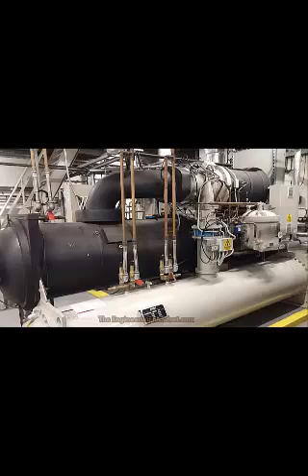The centrifugal type compressor looks a lot like this. It is quite easy to spot because it's got this large unit up on the top of the chiller. You've got the suction line coming off of the evaporator and flowing into this volute shape, and then off of that comes the refrigerant down into the condenser.

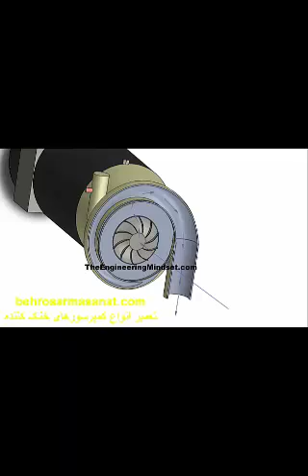So the refrigerant flows, hits into the impeller blades. These rotate, pushes down into the condenser. So the refrigerant flies in, and then as it's flung off of this compressor, it travels in all directions, just collecting up in that volute and going off into the condenser. And you can see that in this animation here, where the particle here is being flung off. So it's a very common setup for a central plant in large buildings.

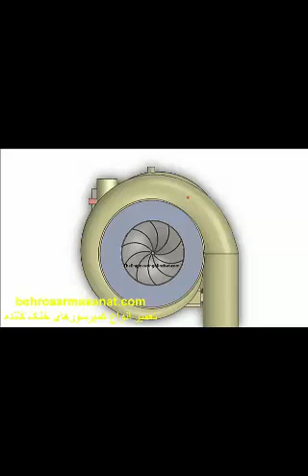A variation of this is the Turbocor compressor. That will look something like this. So you've got these small units mounted also to the top of the chillers, usually having at least two of these on the top. And these work just like the centrifugal type, but they've got two-stage compressors inside, very small ones, and the refrigerant flows in through the front, passes through the two different compressors, and then the refrigerant exits here and travels down into the condenser.

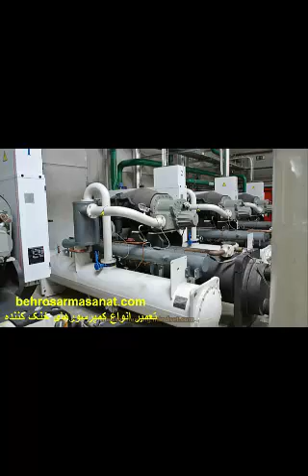Now these usually have magnetic bearings and electronic motors inside, which make these really very efficient. These are going to be becoming a lot more common in the coming years as older technology obviously becomes replaced. Then there's the screw compressor on a chiller. And you can see it's this large unit up the top here. They're typically insulated, especially if they're on chillers which are indoors or within a plant room.

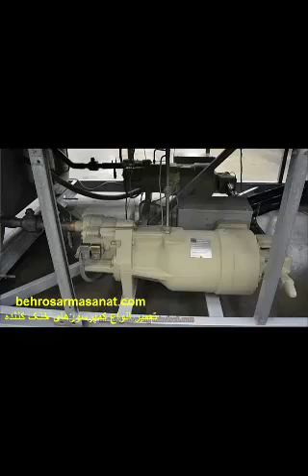And this takes the refrigerant off of the evaporator. It passes through into the compressor. Inside here is two screws in the main body there. The refrigerant then exits and passes through this tube here, and as it exits, we've got an oil separator here, but then that flows off and then enters into the condenser. These are also fairly common on air-cooled chillers, so this is another example of a smaller version.

So we've got two mounted on this chiller, and you can see the refrigerant flowing in there, entering into the two screws which are inside here, which we'll have a look at shortly, and that refrigerant, after being compressed, exits and heads its way off to the condenser. So inside this version, this is the two screws I was talking about. So the refrigerant enters, fills the chamber, and that chamber slowly gets compressed by the next screw passing along, and that compresses the refrigerant up to a very small point, and then that discharges it off to go into the condenser.

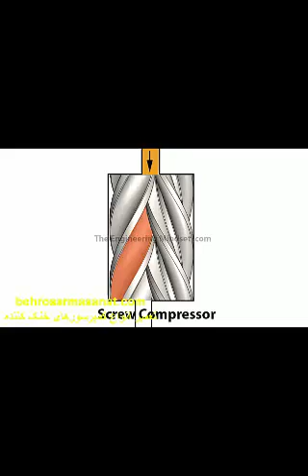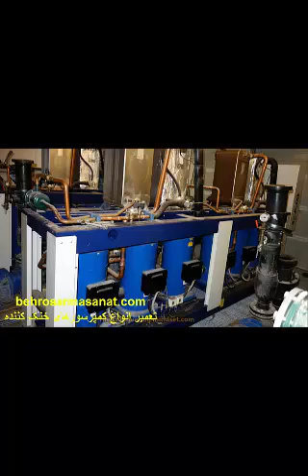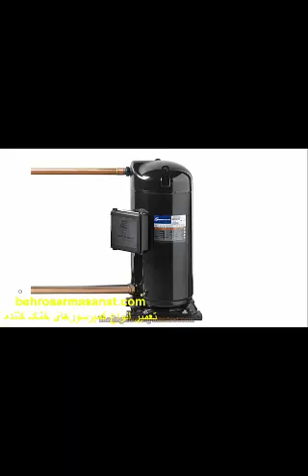The next one we'll look at is the scroll type compressor. And this is an example here of a scroll type compressor chiller. They're pretty common on air-cooled chillers. This is the water-cooled one, and you'll usually find that one compressor isn't enough, so they'll have these banks of them. So these type of compressors, they usually have their inlet at the bottom there, and then they've got the outlet exit there. The compression usually takes place right at the very top here in a fairly small chamber, with most of this unit being the motor and stator.

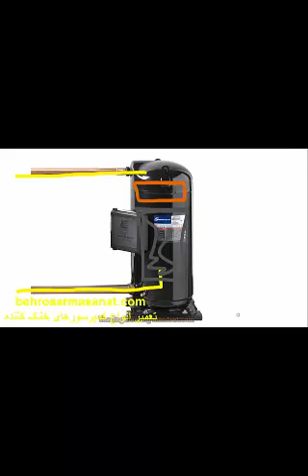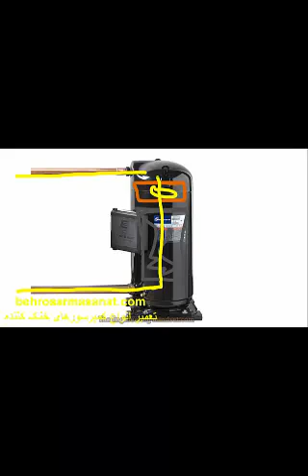So that refrigerant just comes in through the inlet, makes its way in, passes around the motor through into the scroll. Once it's compressed, it makes its way out and goes off to the condenser. So at the top there in the scroll unit, it works a little like this. So the refrigerant enters there. As this scroll is moving, we've got the stator there as well. And the scroll moves, slowly lets some refrigerant in, that slowly gets compressed and compressed until it gets to the point where it then exits out the top and off into the condenser.

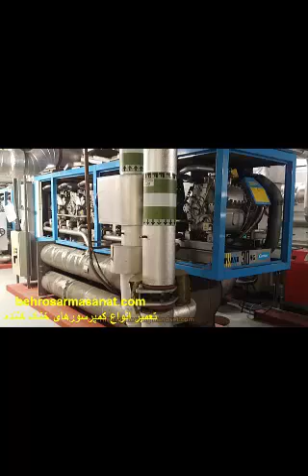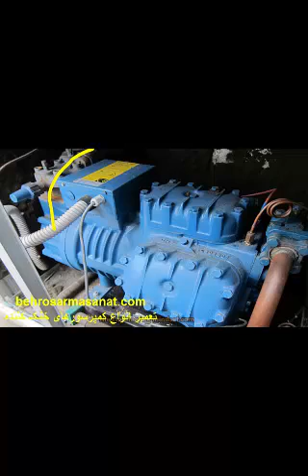And the last one we're going to look at is the reciprocating type compressor. Now these chillers look a bit like this. They're becoming less common. There's a lot more energy efficient technology now, so these are slowly making their way out. But in many existing buildings you could find these, and these are very strong workhorse type compressors. These will just run and run forever. So with this type, you've got the inlet passing the refrigerant in. This section here is the motor, and the refrigerant will pass around that or through that and off into the compression chamber. Once it's compressed, it then exits through here and off into this pipe to go off to the condenser.

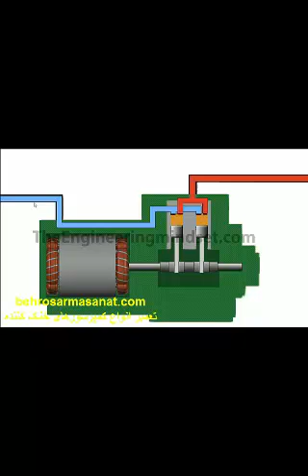And so that works a bit like this. I've drawn the refrigerant just passing through the case here, but it can just pass through the motor to provide cooling for that as well. So the refrigerant enters. You've got these doors here which allow the refrigerant to pass in, and then these pistons which are rotating because of this motor compress that, and once it gets to a certain pressure, these valve heads open, and that allows the refrigerant to disperse off into the condenser. Now these are very noisy chillers, and the technology is based off of like a combustion chamber of a car engine, but they are becoming less common.